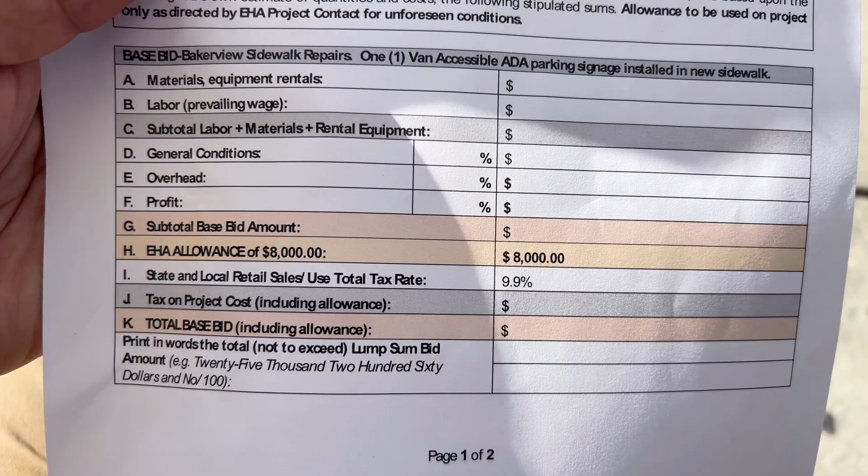If we are awarded the job, then I come back out with the customer, walk the property, and look at how much of this $8,000 allowance we're going to use. And they want to use it for joint filling. I know we don't do a lot of that, but in order to do this project and do the concrete repairs, we have to also do epoxy filling, Sikaflex material in the control joints, and there's also some road wear involved in this job too.

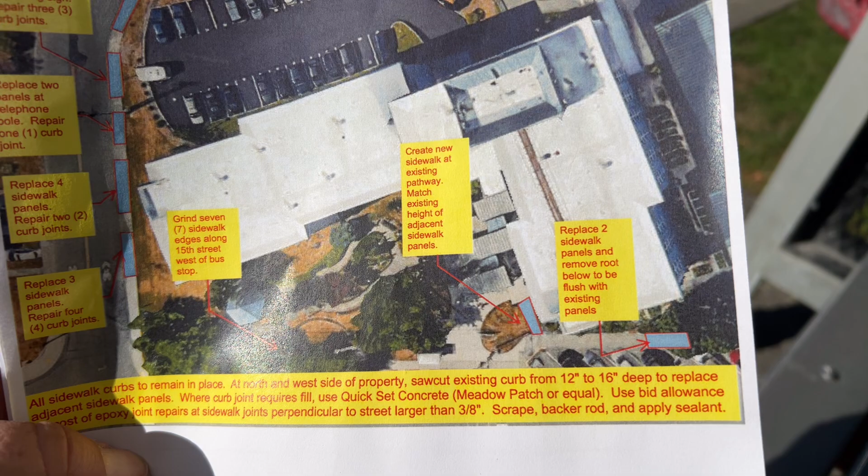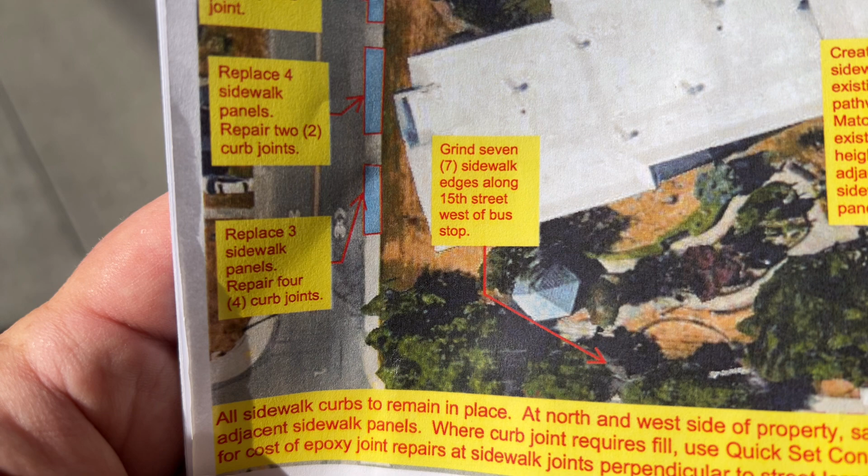So I've got a nice view of the property, and where I'm going to start is right there on that number, and then we're going to make our way over to all these little blue boxes, and then there's a section right down here where it says grind 7 sidewalk edges. We're going to have to sub that out to precision concrete cutting because we can't eliminate that from the bid.

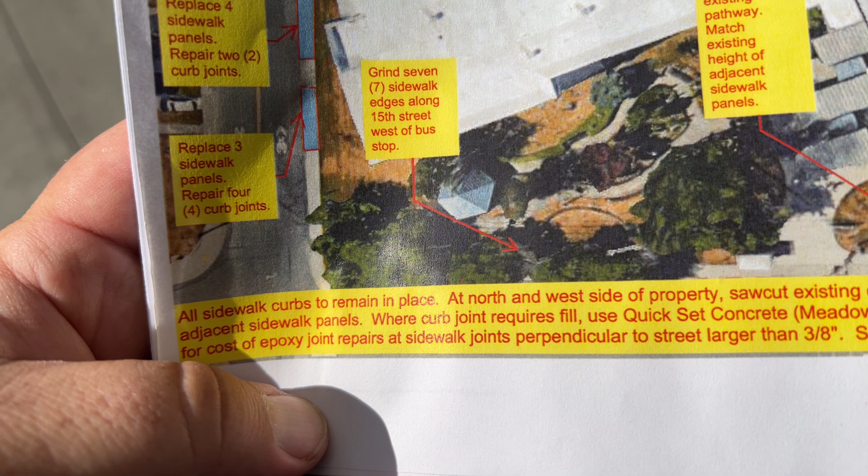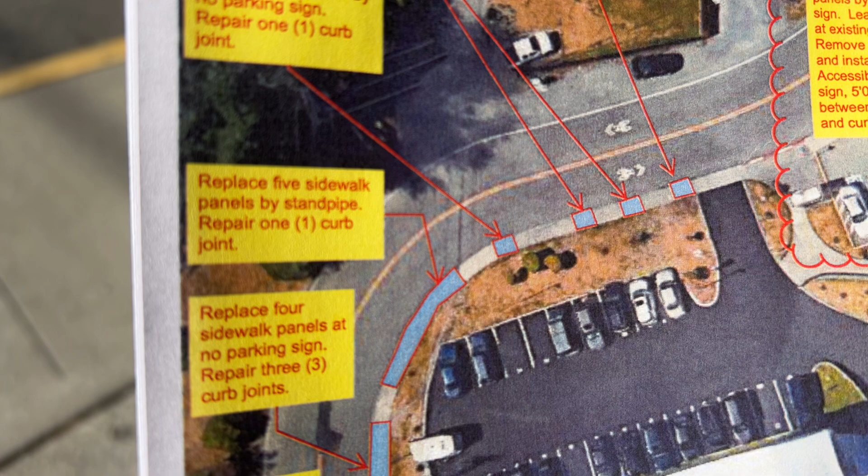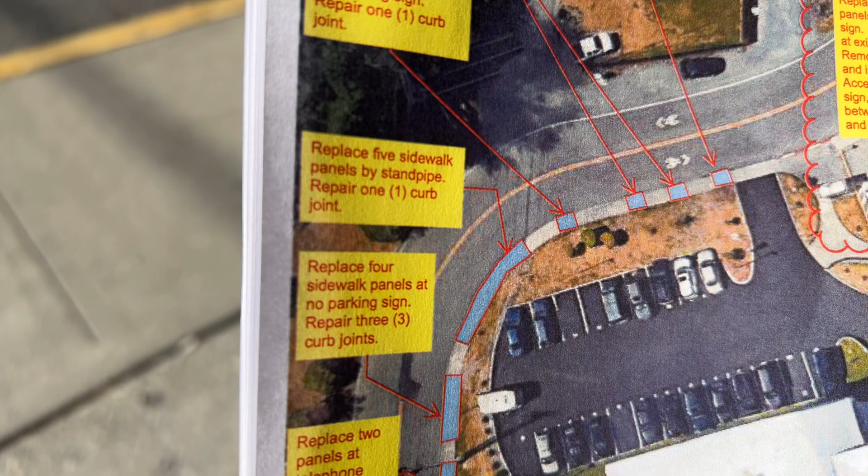We have to have it included in order to get this job, so we'd have to sub that out to them. Okay, and then on this street there's quite a few concrete sidewalk panels that we need to replace, and the curbing was poured monolithically, and the city approved to saw cut on the tool joint where the curb is at, and then just rip out the sidewalk. Okay, so we'll walk through it.

We're going to start down here. So on this sheet, where I'm starting at, Meg did a good job of measuring everything. I've already got all the measurements on all the panels that need to be replaced. I'm just going to show you where each one's at. So I will show the street views and what streets we need to have the street use permit on.

I asked how long it takes to get the permit, and Meg said she didn't think it took too long, but she doesn't know exactly, so she didn't want to be held liable for the answer.

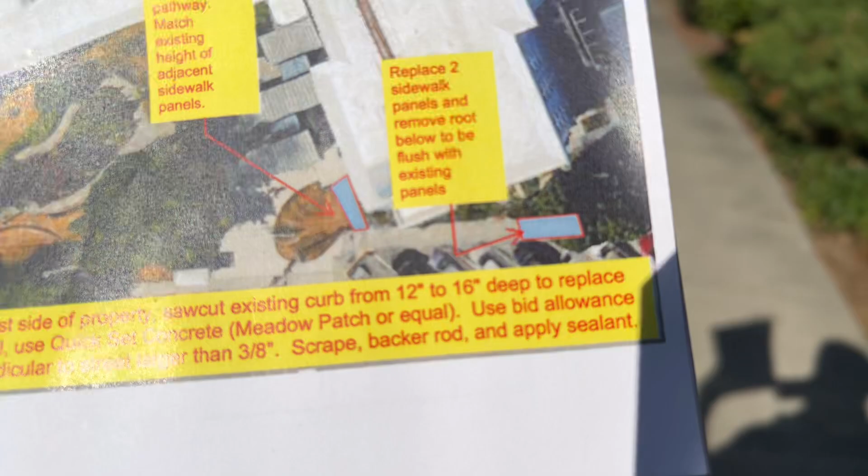So here's our first panel here. It says replace 2 sidewalk panels. She did a really good job of mapping this out. I also got some photos of pretty much all these repairs. So here's the first 2 panels right here, tree root removal.

The next repair is around the corner here, as you see there. That's the description. We got to create a new sidewalk that's 4 feet wide. We're gonna have to take out 4 inches of dirt here. We're gonna pour this up against the curb 4 feet out all the way over. That way they'll have a walkway right here.

There's going to be, I got this one from the hospital. Part of that $8,000 budget will be to fill in some of these control joints here, or those expansion joints. And then as we get to, there's seven joints here. I think this is the first one. That's the second one. That's the third one.

Let me see here. I want to make sure I can share this with precision concrete cutting. So there was the one up by the pole, 2, 3. I think this might be 4. Hold on. Okay, so the first one is right there, right up by the bus sign. Final determination will be after the contract's awarded, and then we'll highlight which one exactly.

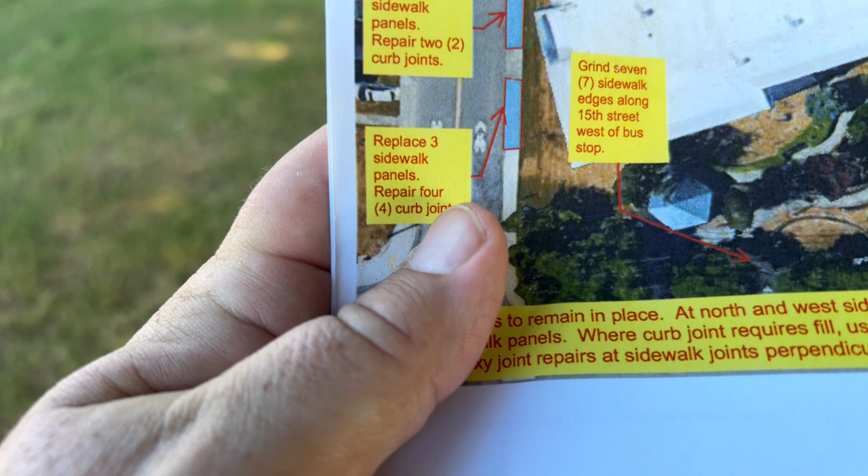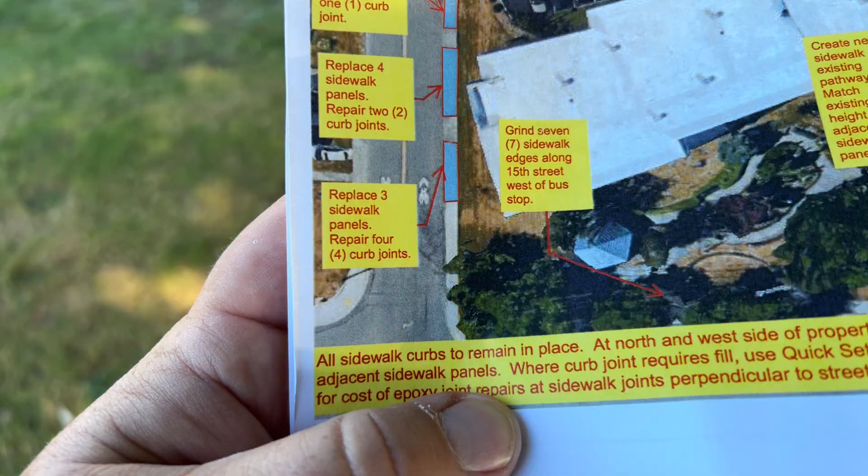All the grinding of sidewalk is on 15th Street, right in this section. So now we turn the corner, we're on Baker. We've got 3 sidewalk panels. We just got done with grinding 7 sidewalk edges. Now we're at 3 sidewalk panels to replace, and 4 curb joints to do road wear on.

So right after the city did this sidewalk, you got the bike route sign, you got 1 panel, 2 panel, 3 panel, and then we use road wear in the curbing. Now the city already approved to do road wear inside these joints we have to repair. I asked the question, she confirmed it. So it's as simple as that—we don't have to rip out the curb.

We saw cut, whenever we replace the sidewalk here, at least 12 inches down, so we'll need Evergreen Concrete Cutting to come out and saw cut these to a 12-inch depth, just to make sure we've got it all the way down and cleared between the curb section and the sidewalk.

Okay, so these next panels are 4 panels to replace, before the tree here—that's 1, 2, 3. Actually, that doesn't make sense. Hold on—oh I see, because we got some chipped out concrete right here and a crack right there. That's the first panel. 1, 2, 3, 4. And then you've got 2 joints to repair, there and there.

The next repairs are 2 panels by the telephone pole. These are the panels that Meg wants. She wants this panel, then you got a tool joint—actually no, no tool joint there. This is 1 panel, this is 2 panels. So just to the left of that catch basin, we cut at that tool joint. Okay, so these 2 panels get replaced.

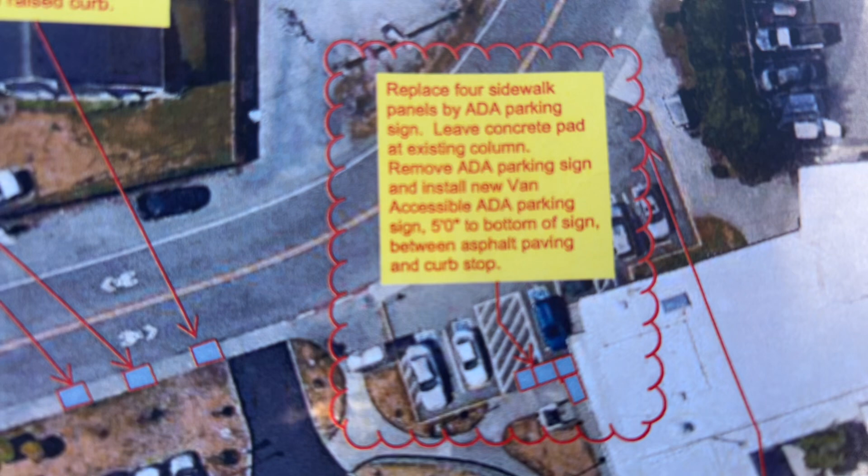And you'll see in the notes it says replace 4 sidewalk panels. Leave the concrete pad at the existing column, so I'll show you that. Remove the ADA parking sign and install a new van accessible parking sign, 5 foot to the bottom of the sign.

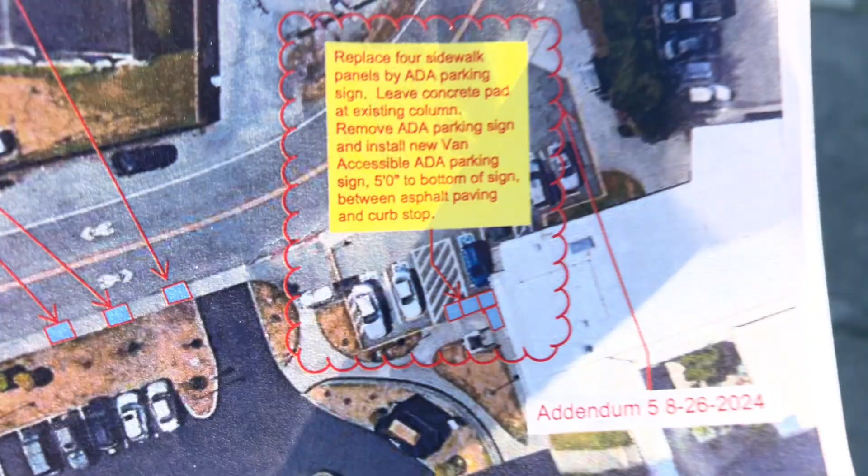This is surface mount. I have the detail of the handicap sign—it needs to be van accessible on the panel. But we'll replace 1, 2, 3—this panel here, so those 3. And then right here by this little box, we'll do a saw cut straight across and then take out this concrete panel there, leaving that little base.

This sign panel will go on the ground right outside the curb instead of being up on the sidewalk. There's a crack over...